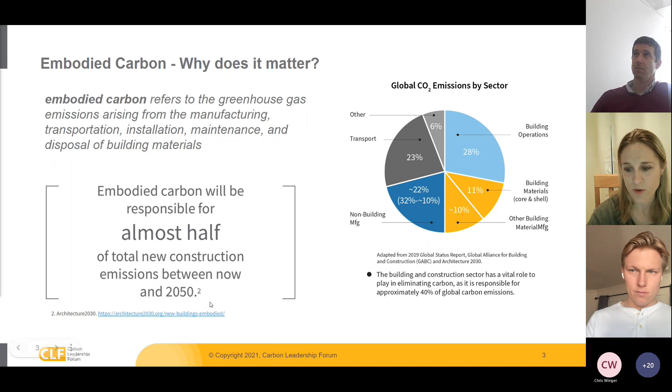The Carbon Leadership Forum is a group that has arisen out of the University of Washington, but is now national and international. We are a local hub, and there are hubs all over the country.

The Carbon Leadership Forum develops materials for architects, engineers, and policymakers to look at embodied carbon and how to reduce it, and has a very large library of resources assembled from a lot of different partners, as well as things they have researched and put together themselves. So if you haven't already checked out the Carbon Leadership Forum national site, please do.

We are a local hub, and we extend just for Wisconsin, but often try to do things as well with Twin Cities and Chicago going forward. We're pretty new, we've just gotten launched in the last 6 months or so, and are excited to bring this opportunity to connect here in Wisconsin.

We have a new website, and it's still a work in progress, but has information about upcoming events, as well as links to the Carbon Leadership Forum library. So be sure to check that out if you have not already.

Goals of a Carbon Leadership Forum hub: to bring people together, to offer educational programming, to help identify possible action items as a group that collectively could help advance the issue of reducing embodied carbon, and also just to help everyone connect and figure out what resources work, what things are going on, and what we can learn from the examples going on around us.

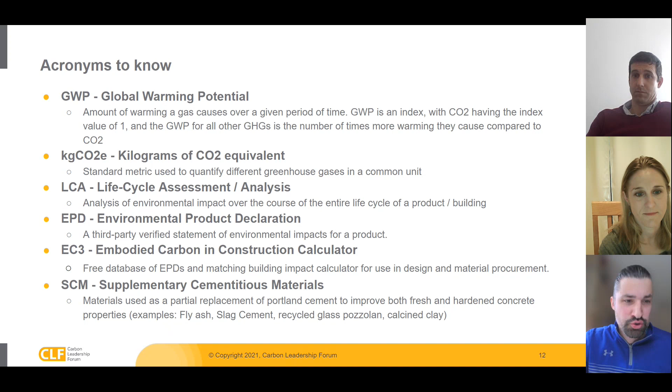For those of you who've been operating in this space at all, you know that there are a number of acronyms that are important to understand. I'm not going to read through these, but these are, I guess, 6 that I pulled out as I was going through the slides for items that might require a little bit of definition. Some we'll get into, again, if you want to reference the slide deck at the end. These are important topics and metrics and tools within the space that you should become familiar with.

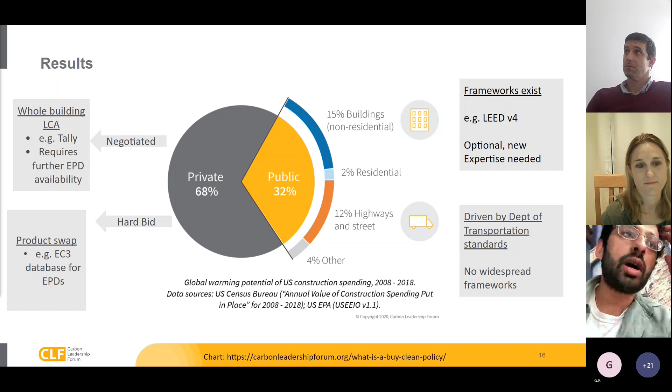If we look at the overall embodied carbon emissions that are associated with construction and infrastructure, about two-thirds of those are associated with private construction, and one-third are associated with public construction. This is straight from the Carbon Leadership Forum. And so what we were interested in is, if we wanted to understand how embodied carbon emission production would be affected by federal mandates,

we needed to break down this private and public distinction further. And so what we realized is there are a few camps with different abilities to adapt to federal mandates. If we focus on the private sector side, which I think we're going to hear some really good examples of in the following presentation, we have a lot of projects that would be considered negotiated. So projects where the private contracting firm has the opportunity to perform a more detailed life cycle analysis to study what design and finally what construction might reduce the carbon impact of a specific project the most.

Towards that end, a lot of companies have been adapting different life cycle analysis tools, particularly for building construction, such as Tally. And then we have hard bid projects where there's already a design in place, and for example, a general contractor is coming on to implement the construction. In these situations, there is still an opportunity for carbon reduction through product swaps. So things where perhaps you swap out the use of one concrete for something with equivalent performance characteristics, but a lower overall CO2 embodied emissions due to, for example, how the material was sourced. So I think we'll hear some really nice examples of the private sector side.

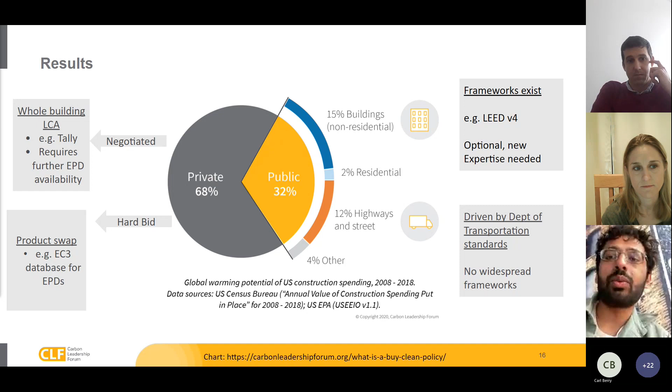So there's still quite a bit of work to be done on the public sector side. If we look further at the infrastructure side, roads, sewers, sidewalks, etc., the surprising thing I learned from all this canvassing is we haven't seen widespread interest or use of frameworks that look at embodied carbon in these projects. Given that this is going to be overall one-sixth of global carbon emissions from embodied carbon, this is an area CLF should think about focusing efforts on, because there's quite a bit of opportunity.

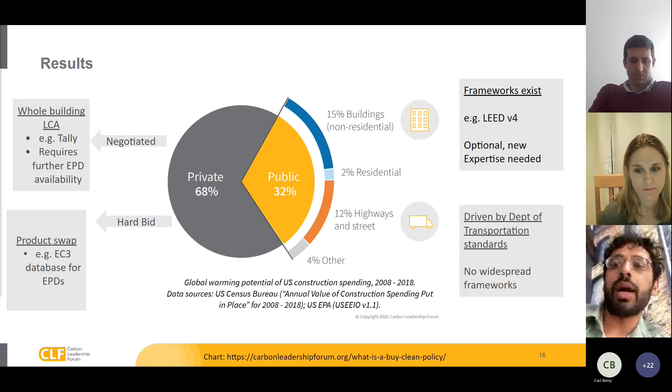Next slide please, Ben. I think the other set of takeaways after speaking with folks involves both bottlenecks and takeaways. For the bottlenecks, what is holding us back from implementing further adoption of green procurement standards? On the public sector side, it comes down to what it always does: a lack of public pressure to address scope 3 emissions, and associated with that, a lack of willingness to increase how much we as taxpayers are going to pay for things that inevitably cost a bit more.

Also interesting is that these are really new frameworks that would need to be adopted by public sector organizations. So if the Public Works Department of the city of Milwaukee wants to use LEED version 4, there haven't been a lot of projects done with that so far. One takeaway is we really need to encourage example projects and learnings between public and private sector to reduce friction on the public sector side.

On the private sector side, general contractors and design firms are going to be beholden to what clients are asking of them. If you have a forward-thinking client interested in reducing carbon emissions of their project, that's great, and a design firm can work with that. But if not, we're limited. The other big takeaway is a lot of these pieces are starting to come together, but we're still in the process. Perhaps there's room for improvement in the actual tools used, but it does seem like there's a certain set of tools that people are coalescing around, and we'll hear some examples of that today.

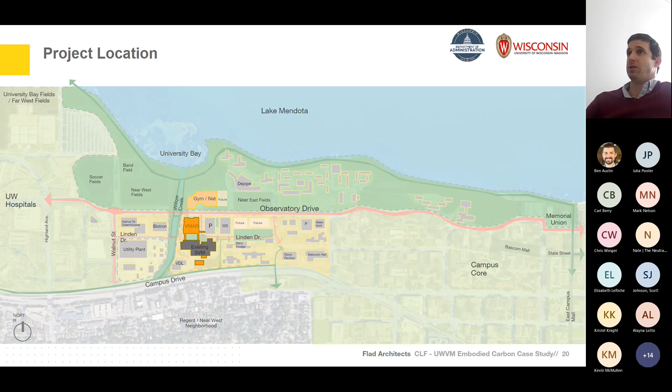So next, there's a little graphic that just popped in, showing what this project was. For various reasons, a decision on final structural system selection for the expansion took a very long time. It wasn't my place to know why it was taking so long, but it did.

One of the interesting things we were able to do, because we had the analytical models even though we didn't have a design or documentation model in Revit completed, was use various plugins - a RAM Revit link on one side, and then a link, I believe done in Tally, to take the rough Revit model. That let us get order of magnitude understanding.

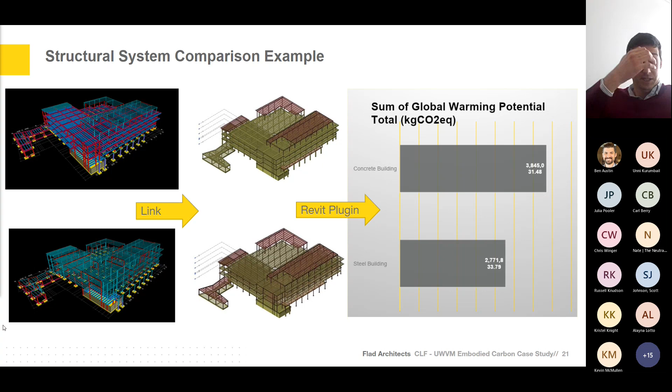So in the middle of this project, everything was getting shut down for COVID, which was a whole different problem. But the other thing happening was the SE 2050 program was really starting to kick off - the structural engineering, American Society of Civil Engineers effort to reduce embodied carbon in built structures to zero by the year 2050.

A lot of people are familiar with AIA 2030. AIA 2030 initially focused on reducing operational carbon to zero by the year 2030, and has since developed embodied carbon reduction goals beyond that as well. But SE 2050 is the structural profession's effort to really reduce the amount of embodied carbon in structures.

Depending on what you're looking at, construction is somewhere between 8 and 12% of global carbon emissions annually. So it's a big piece.

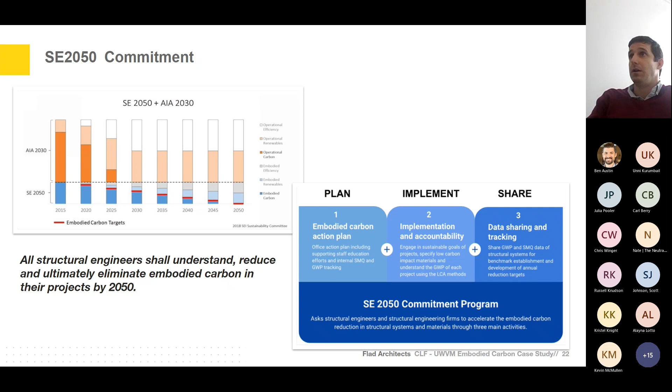So we were working on that, and part of what we had to do was report. That's that share number 3 there on the right hand side. Share our data essentially. This is kind of a hard slide to look at, but basically SE 2050 maintains a database of submitted projects by all signatories. In the initial year of the signatory, you're required to submit at least 2 projects to the database, and beyond that, the increase is sort of on your own.

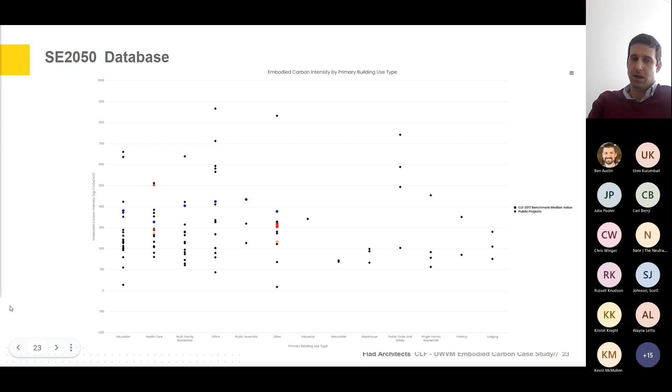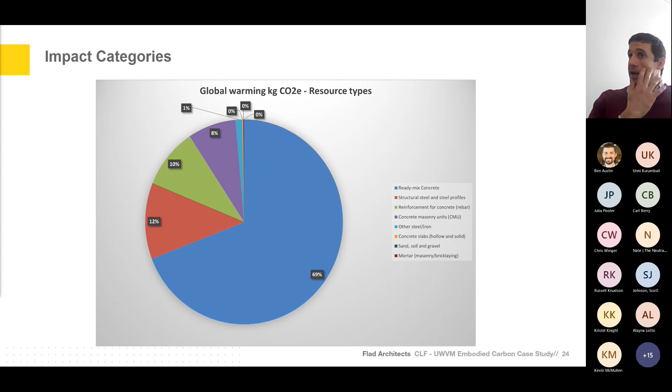This is not anything that we tried or required over and above industry standard. And I think it's eye-opening because one of the things that's happening right now is we're all trying to establish baselines. It's really helpful to understand that the closer to real information we can get, the more informed decisions we can make about improvement.

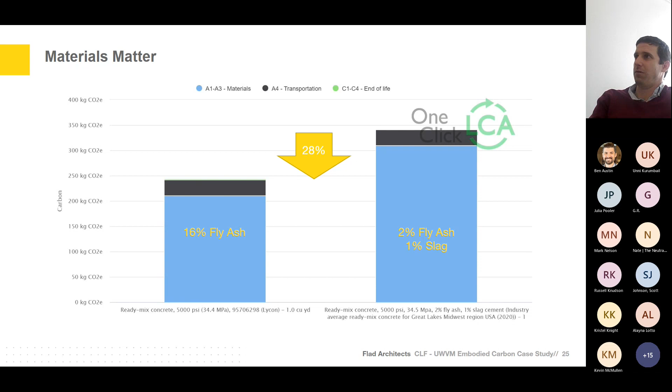So the baseline for this project was the regional average, and then during the project, Lycon was able to develop mix specific EPDs, and so we were able to compare those to what our regional average were.

One of the things the state spec also required was a comparison of a 0% replacement concrete. We didn't perform an LCA based on all of the concrete being 0% or 100% cement, but Lycon did actually end up producing an EPD for that situation. And if we wanted to, we could go back and compare a 0% replacement versus the regional average versus the project specific, and really see how much of an impact replacement has.

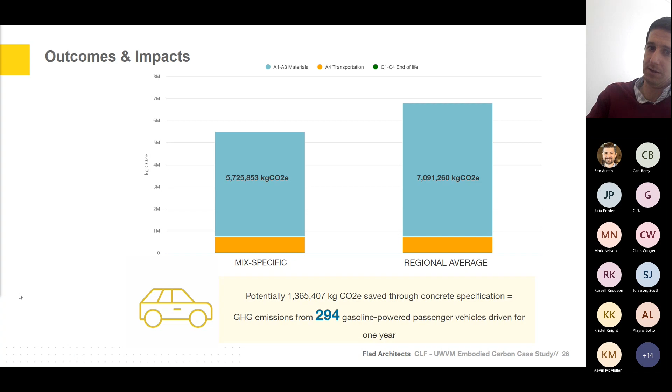All right, my name is Chris Winger. I work for Lycon, we're a ready-mix producer here in Wisconsin, and my segment is really on developing EPDs.

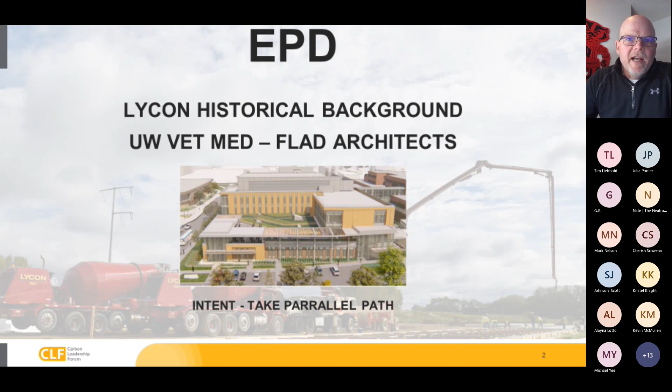So a bit of historical background. This ties in pretty well with Tim's project he was just talking about. The Vet Med project was actually one of the first projects we saw that had detailed sustainability language other than LEED. They were listed as a specification option. And while we were already working on reducing the embodied carbon in our concretes, we weren't really in a position to provide verified sustainability options. We had a vague understanding of the sustainability movement, but we were just starting to get our feet wet. So our intent was to take a parallel path, kind of working in the background while that project was being built, and to actually develop a verifiable program to do that.

There are many commercially available products that can help reduce carbon emissions. We had already been approached by several companies several years ago offering products to reduce carbon emissions. Some of these I'm sure you've heard of, some probably not, but as we were investigating these options, we came to realize the primary goal of all these products is cement reduction. At the time, these companies and products were making claims that they could reduce our carbon emissions by 3%, 5%, 10%, whatever. But we kept asking the question, reduce the emissions from what? What is this number, and how do I measure all of this?

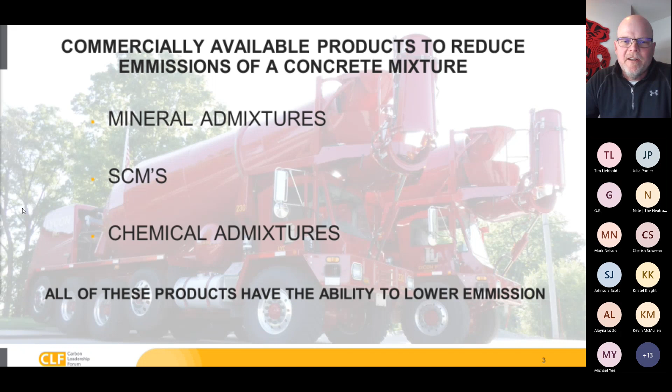And the answer to that is the global warming potential, the GWP, which is equivalent to the CO2 emissions generated in the manufacturing of a product. So how do we know what the GWP of a concrete mixture is? Well, an EPD. Adding a product may enable lowering a GWP, but that does not necessarily mean that a concrete mixture is as environmentally friendly as it can be. You're lowering the GWP, but the EPD quantifies the environmental information on the life cycle of a product to enable comparisons between products fulfilling the same function - concrete versus concrete.

They provide a detailed analysis of, in our case, a concrete mixture. They're third-party verified and registered with NSF International. They take into consideration all the environmental impacts of producing a yard of concrete. And a lot of the products you can add to your mix, they can give you the reduction, but again, that doesn't necessarily mean you're doing well with your mix.

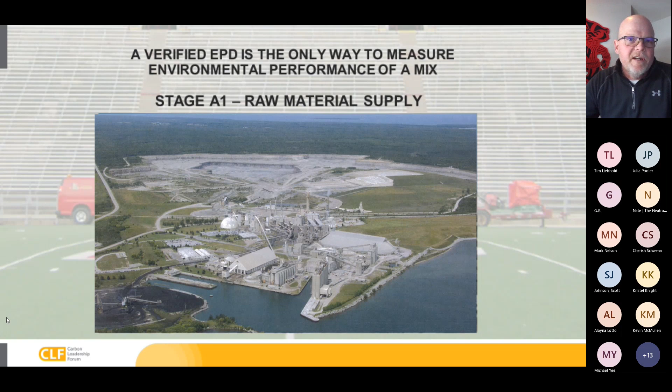Transportation, stage A2, is how we get our raw materials and products to our plants - is it by truck, by barge, by rail, by boat? If we deliver and ship aggregates to our plant by train, we can do a much better job than if, say, we're hauling it in dump trucks. It's more economically and environmentally friendly. And then stage 3 is the manufacturing - that's a picture of one of our primary plants in Dane County.

And that calculates the emissions generated to produce concrete, including the heating and cooling. Again, our primary plants in the Dane County area are central mix plants, which means the concrete is actually mixed by an electric mixer in the plant itself. Most ready mix plants, the dry materials are dumped and loaded into the trucks, and then the trucks mix the concrete by their diesel engine.

So the central mix plants, they mix the concrete, dump it in the truck, and the product is more or less ready to go. So once all that information is generated and third-party verified, the EPD is submitted to be registered. So the GWP is extracted from the EPD then and can be used to compare against National Ready Mix Concrete Association regional benchmarks.

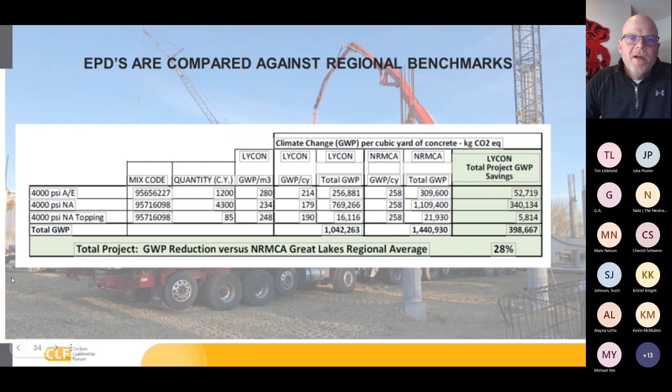So this is just a hypothetical project, I guess. It lists a few mixes, the mix design, how many yards of concrete, the GWP that we're producing with the mix, the National Ready Mix benchmarks, and then the green shaded would be the total savings. Again, this is a hypothetical, but that's kind of the way it works.

So next slide, please. Where are we headed? We're currently pursuing the ability to develop EPDs in-house. Things are moving really quickly with this, and the learning curve has been pretty steep, and we want to have the ability to test various materials and mixtures simultaneously to see if it's worthwhile to even submit for an EPD. Right now, we're relying on third party to do a lot of this stuff for us, and the process as it stands now takes months.

One thing I would add that's important is, we can reduce the cement content of our mixtures. It's important to evaluate how these changes will affect the performance, how they impact other project constructability requirements, such as pumping, placing, finishing, strength gain, scheduling. We can take cement out, but if we don't get our post-tension strengths within the desired window or finisher overtime costs increase, are we really helping the entire project team?

So all of these aspects must be taken into consideration and addressed when designing these low embodied concretes. Sometimes it's not easy. It requires trial mixes, testing, and all that concrete testing, as you know, takes a lot of time.

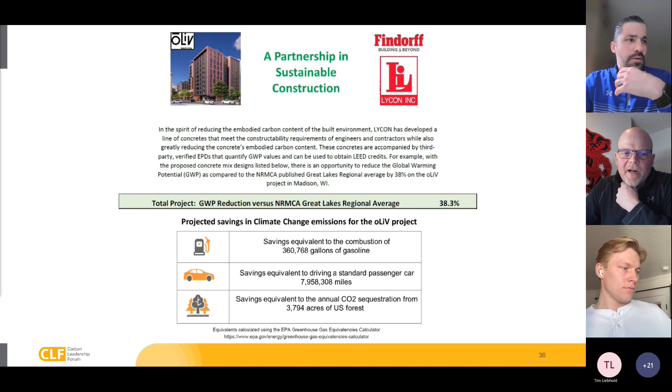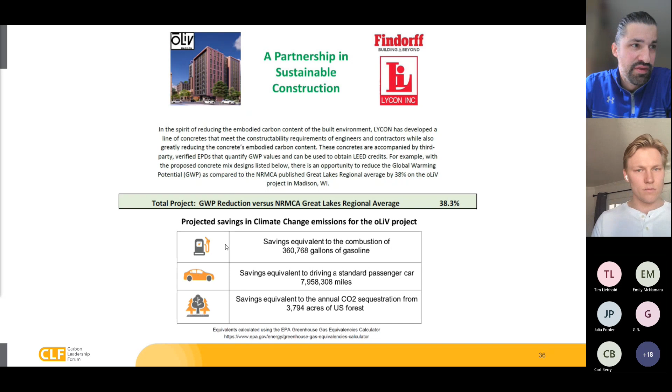And then one other FYI for the group, I was on a webinar, an EPA webinar last week. They're having another one next Wednesday, but the EPA is administering or managing the $250 million in the Inflation Reduction Act related to environmental product declarations. There are, I believe, some competitive grants for suppliers to access some of that funding. So I put the link in the chat to the event taking place next Wednesday. Jump on that if you want. Obviously engage with us at the CLF Hub. We'll try to keep this group up to date with that funding as they kind of figure out how it's going to be administered. All right, over to you, Nate.

Thanks, Ben. Thanks for having us. So I'm Nate with the Neutral Project. I'm one of the managing partners here, and we're a local developer based out of Madison, Wisconsin. And really our mission is around sustainability and reducing both the embodied and operational carbon emissions in the built environment. And how we do that primarily is by building with mass timber, but there's also other ways that we do that by using low carbon impact materials and then designing to passive house standards to reduce the operational carbon.

But I know for today, we're going to talk mostly about embodied, so I'll stay on that topic. So we have our catalyst project called Baker's Place, on East Washington, and that's a 14-story mass timber high rise.

The really cool innovative thing we did there is it's a hybrid structure. We're using steel for some of our columns, concrete cores, but then replacing all of our beams and decking with CLT and glulam. Right now that's a reduction of about 42%, including biogenic carbon.

So the impetus for why we wanted to use mass timber is because it has this unique ability to actually sequester carbon. The way that's done is trees in the forest are grown, and through photosynthesis, they take in carbon. Then when you take those trees down, put them into a manufacturing facility and then into a building, you're in essence creating a carbon sink.

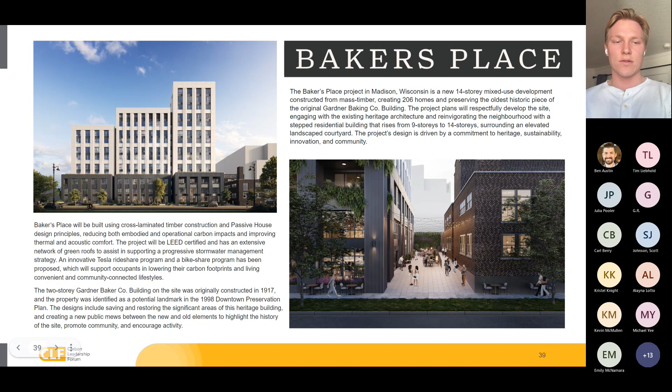That's our thesis, to use mass timber for this building, but then all of our future buildings as well. So for this building, we did a little bit of a case study and got some funding from the USDA for an LCA we're doing right now, and we just finished our first round.

We took essentially two scenarios: one was our baseline, which was concrete, and the other was mass timber. This might be a little too broken down for some people here, but just to give background on what an LCA is - it's essentially a full life cycle analysis of the building, and it breaks down the building into all of its constituent elements.

For concrete, what we did is put together a BIM model, broke all the pieces out into its constituent elements, and then quantified the embodied carbon impact if we were to build Baker's Place as a concrete building. Then we looked at our actual building, which is a hybrid system with mass timber, steel, and concrete, broke it all down into its constituent elements and built it back up to look at the total embodied carbon of the mass timber.

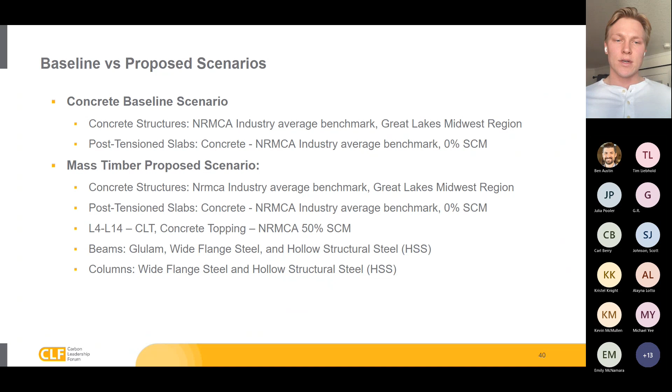We came to this great result: if you include biogenic carbon, we're at about a 42% reduction. Biogenic carbon is essentially what I spoke about earlier, the sequestration of wood and the carbon stored in the wood. So if you include that, we're at 42%. If you exclude that, we're at 20%.

Really why we're at such a big increase, even if you exclude the sequestration of carbon, is because our concrete podium is so much less intensive - because the actual mass timber is way lighter than a steel or concrete structure, you don't need as much in the podium itself. That's one reason. The other reason is we're using some of these low impact carbon materials that are really reducing our embodied footprint.

So the goal for the Neutral Project is that over the next 3 or 4 projects, we'd be able to get that 42% to hopefully 90 or even 100%. As we progress and iterate on our design, we'll get closer and closer. With the work everyone else is doing here with Chris and the rest of the team, we think by reducing some of the other areas like concrete and steel, we'll be able to increase that number and hopefully eventually get to 100% one day.

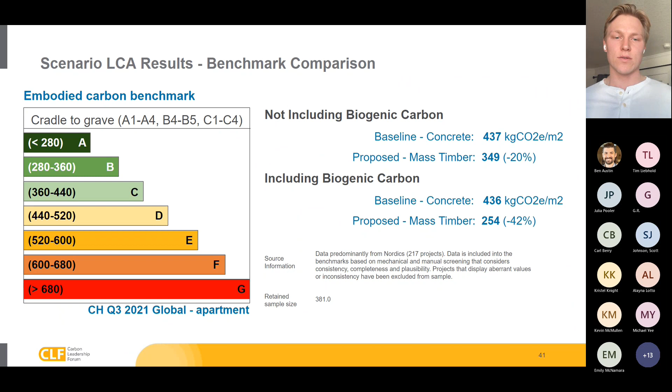So that's all I had. I know it was a shorter presentation, but happy to take any questions.

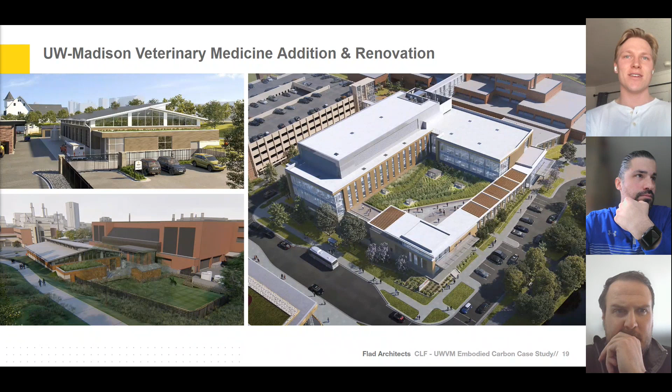Yeah, that's actually something we're doing as part of our case study for Baker's Place. I don't have the answer yet, but hopefully will, and maybe we can come back in 6 months and tell you our findings. There are more materials involved, which inherently means more embodied carbon, but they're also more intensive materials. So I'm curious about that question too, and hopefully this case study will show us the answer. Wonderful, thank you very much—great presentations, all, thank you.

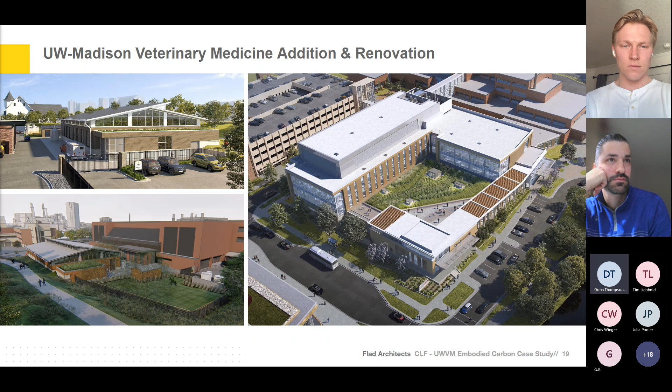I appreciate the comment, Nate. As these presentations show, I think there's better understanding out there and a realization that depending on the project, particular materials will be a better fit than others, and there is no one right answer. So working with a combination of materials certainly makes a lot of sense.

As time goes on and as knowledge grows, being able to look not just at embodied carbon at the front end, which is obviously very important, but looking at the full life cycle and understanding impacts over time matters. I think it was Ben who mentioned that if you can keep an existing structure and not tear it down, that's the best way to avoid these issues. And if we build them better to last longer, we'll go a long way toward improving the environment across the board.

Thanks, Donn. Appreciate that comment.

Kim Radine had a note in the chat. Chris, I don't know if you saw that. I'll repeat it for the group: for a design-bid-build project, where the architect and contractor aren't both at the table early, how can a team try to start working with manufacturers early enough to get low embodied carbon mixes figured out for a project? I guess first of all, the required strengths are very important.

If we already have EPDs on the shelf that the mixes would fit, which we very well could—we've got over 20 of them right now, but we're continually working on more—and the type of concrete matters. Some concrete mixtures are less than super high strength, and super high strength concretes and things like that are going to have a higher environmental impact.